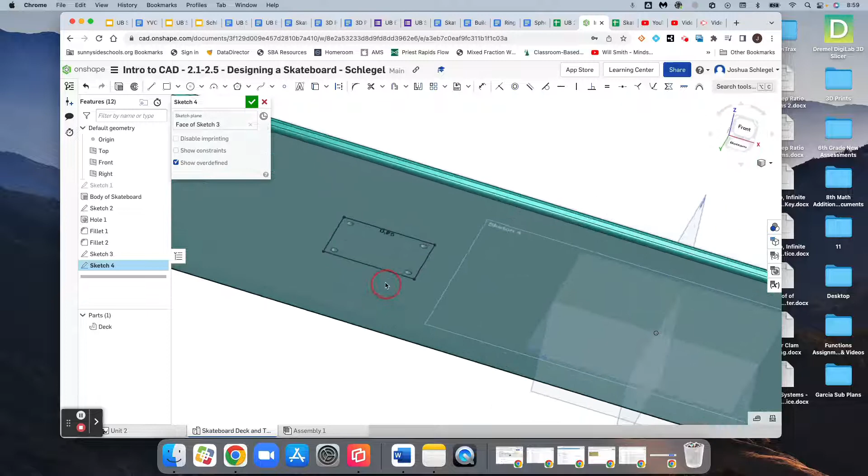So step 4 here will be to extrude the rectangle that we created. It's important to make sure that you created the rectangle on the bottom of the skateboard, not on the top. Check that—if you did it wrong, use the undo button to get back, flip it onto its bottom, and create the rectangle on the bottom. So make sure again that the rectangle is on the bottom.

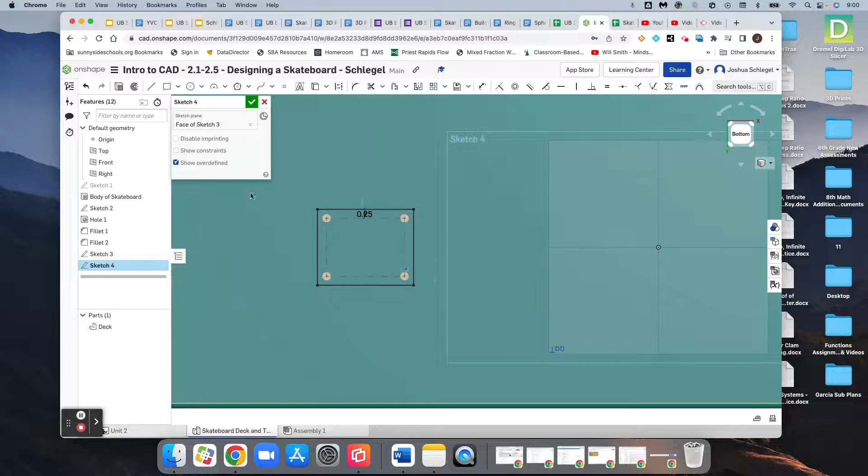Now we're going to extrude that rectangle, which means to give it some depth or make it thick. We want a thickness of 0.25. So come over here—we have our sketch 4, this larger rectangle that we just created, selected. We want to extrude it, and we want an extrusion of 0.25.

There are other settings I think we need to check. We need to make sure that it's a new extrusion, not an add. So let's do that. There's options here like add, or remove, which would be to take it out, like cut a hole. This is a new extrusion, so this is a new part going on here, not something we are adding to what already exists. Okay, so we hit the checkbox.

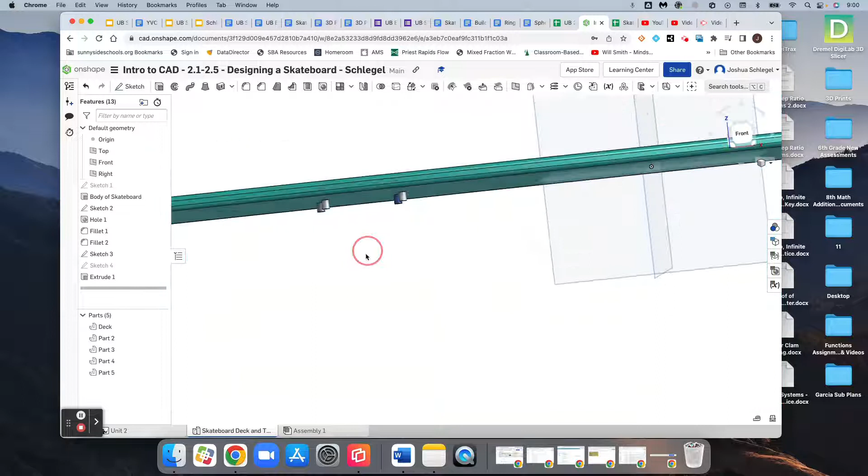Oops, and I accidentally selected the holes. So you can see that I made a mistake. I'll fix that. Let's go back to sketch 4, which was the sketch of the rectangle there. Let's extrude it.

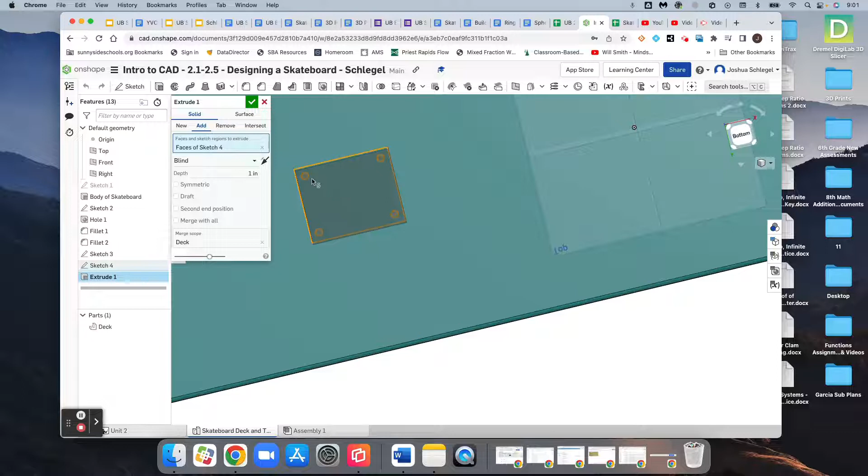0.25. And now we've got—and that was set up as add. I got to make sure it's new. So there's lots of things to check in this step. Be careful with this one. So there we go, that's what it should look like.

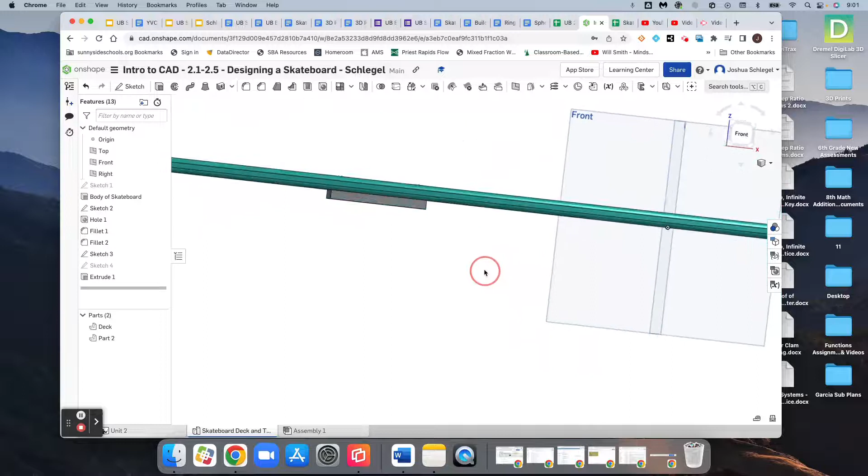We should have a gray pad underneath our skateboard now, that's 1/4 inch thick. For me, this step was tricky. I hope that if you're having difficulty, this video is helpful, and I hope you have an awesome day.